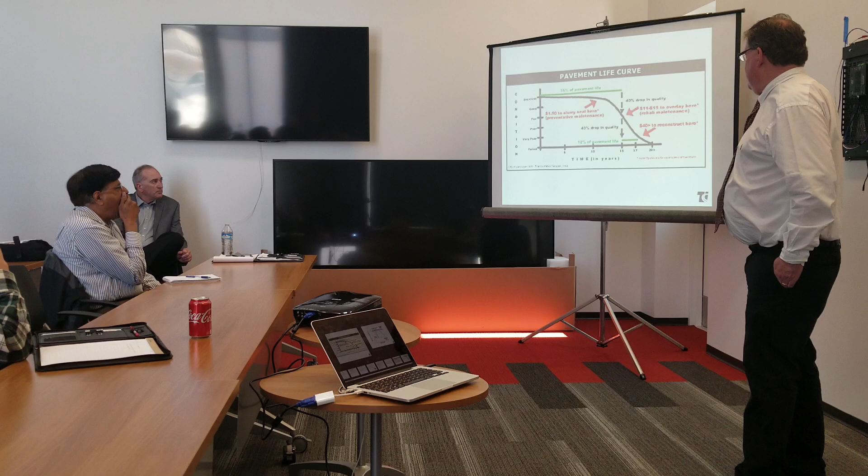Because at some point, that deterioration accelerates in rate. And if we wait until that steep part of the curve, we're going to spend much more on our maintenance or rehabilitation of that pavement. The idea is, we do maintenance, we shift the curve out, we get additional life.

An example from Whistler, because I was promoting the tool. This was out of a consultant's report to the Town of Grafton, and it's an example of the kind of simple what-ifs you could do with that software. They looked at their system, PASER 1 to 10 rating system. I don't like that it says 0 there because there is no 0 in the rating system. They sorted basically their system into what percent falls into each of these bins.

0 to 3 that need reconstruction, and you can select these parameters in the software, so you can select whether you want to do 0 to 3 or 0 to 2 or however you want to sort it. So they have almost 3% in that condition, 21% in 4, 18% in 5, 21% in 7 to 8, 31% in 9 to 10. So what happens if we continue with our current budget for 5 years? Well, it goes from this to this, based on their current budget and their current maintenance procedures.

Any problems with that? There, I'll give them to you both on the same graph. First thing, you do not want to manage based on average rating. You don't want to go to your council and say, well, we're going to continue on this. It's really not that bad with this current budget because we were at a 6.98 average rating, and projection 5 years out, we're going to be 6.72. So it's not that bad. It hasn't changed that much.

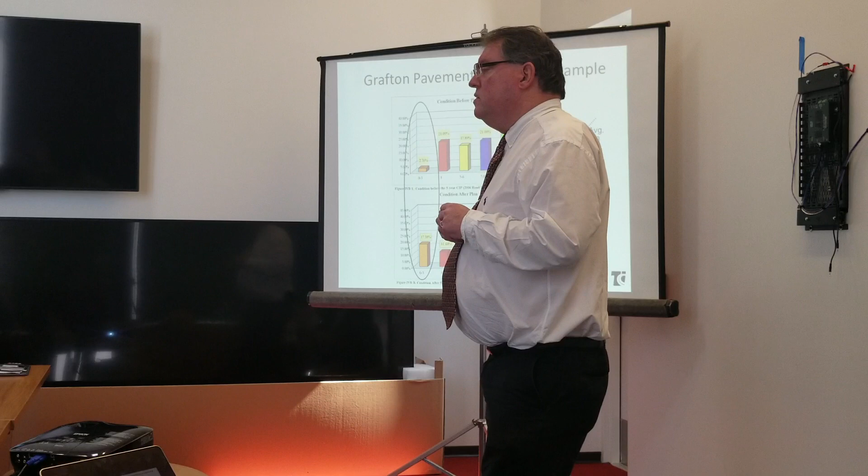I was curious. So you're saying that from your experience, you think that what it's doing is giving you a percent of segments. Yes. Okay, I will check on that. For us, Whistler has about 1,000 segments, and for our in-house database, we have about 500. You can go into that system, I know you can split segments, I believe you could also combine segments as well. So if you would like to get it to match up better with your in-house, that can be done. So being that it's based off of segments, is that really a true projection of where you're gonna be? If it's based off of segments, it's going to shift that a little bit.

In the city of Middleton, we have around 72 miles of road. If I'm basing that off of segments versus miles, I'm not gonna be able to look and say, in my 72 miles, my percentage is this. That's where I wish it would flip it, by the mile. Okay. I'll check into that a little more, and if you have a minute at the end, we could have a discussion about that.

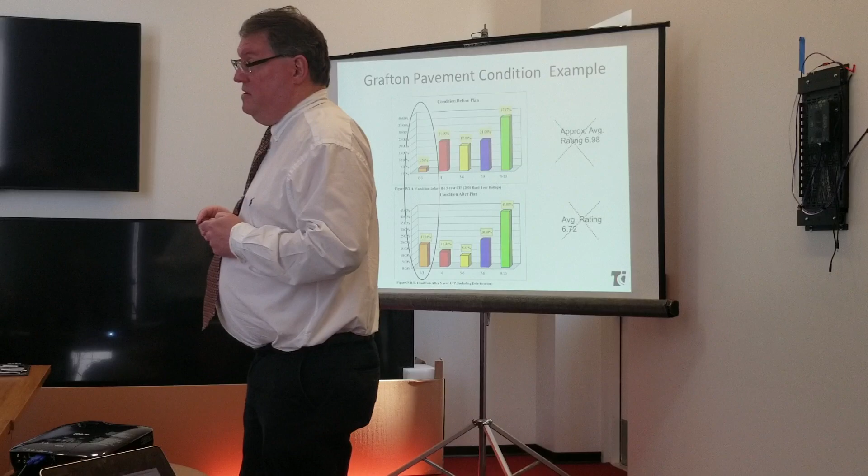I have the disadvantage, I wasn't on board when they developed the software, but I am trying to talk them into doing some upgrades. So getting that kind of feedback, trying to get upgrades on the condition deterioration curve so that they'll match a little bit better to experience as well. So I'd like to talk to folks who are using it about some of those things. I'll be happy to have a little discussion at the end about that. Yeah, I would say that is a good idea, just way too many segments.

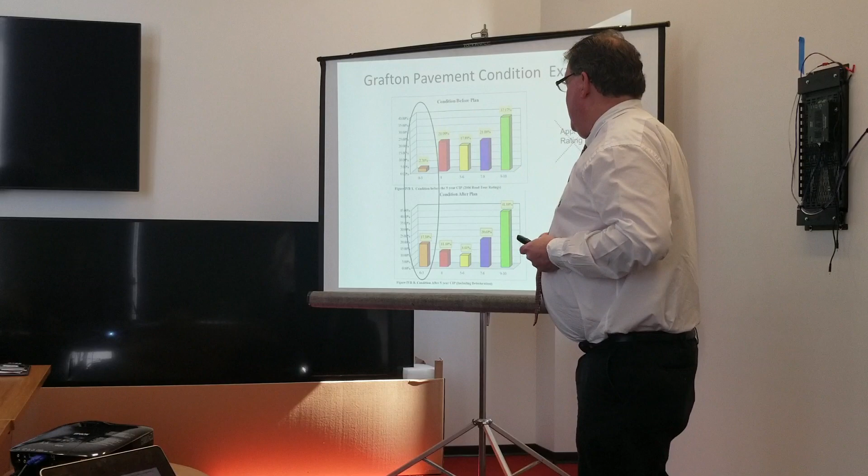Yeah, although in terms of looking at ratings and segments, and this is going to kind of veer a little bit from the topic, you want to select the segments based on pavement that is in similar condition. Okay, so if you had, and I realize a lot of times in cities and villages, you're probably doing it by blocks, roughly. So if I have 5 blocks that were constructed at the same time, the same condition on the same road name, I'm probably going to do that as one segment. But if 2 of those blocks were constructed at a different time, have a different thickness, probably should be a different segment. It probably does make sense to break it up that way, even in your rating system.

If you're getting down to breaking down smaller than blocks in a city, that wouldn't make sense to me. But it does make some sense to break it up by the parameters of that. If there's an area that I know had very poor soils and it's going to perform differently, it makes some sense to break that out from the rest of the segment.

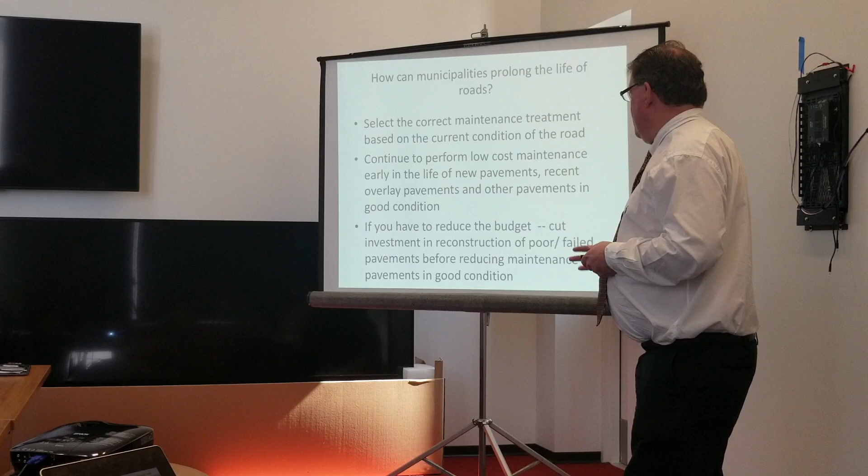All right. If we're looking at budget issues, don't cut your crack sealing, don't cut your surface treatments, don't cut those lower cost maintenance treatments, because those are things that are delaying the deterioration of your better conditioned pavement. That's a little bit of a challenge, because you go to a board and you say, well, we need to keep spending money on this, let's cut one of these reconstruction projects so we have money to do maintenance.

And what do people call and complain about, or come to board meetings and complain about? The roads that are a 6 or a 7 or an 8? No. You know, the 4, the 3, the 2, that's what gets the attention. But if we continue to do that, shift the resources just to the worst conditioned pavements, we're going to dig ourselves a bigger hole. There is no magic bullet.

Despite the fact that in Iowa, the Asphalt Association has a thing here that says they found the magic bullet. It's just the magic bullet for interlayers between concrete pavements and asphalt pavements. They have a lot of concrete local roads in Iowa, more than we do in Wisconsin. So actually, when you read the article, it's a tool that they found is very effective for a certain application. And that's the way we should look at all these maintenance tools. Selecting the right one for the particular conditions that we have.

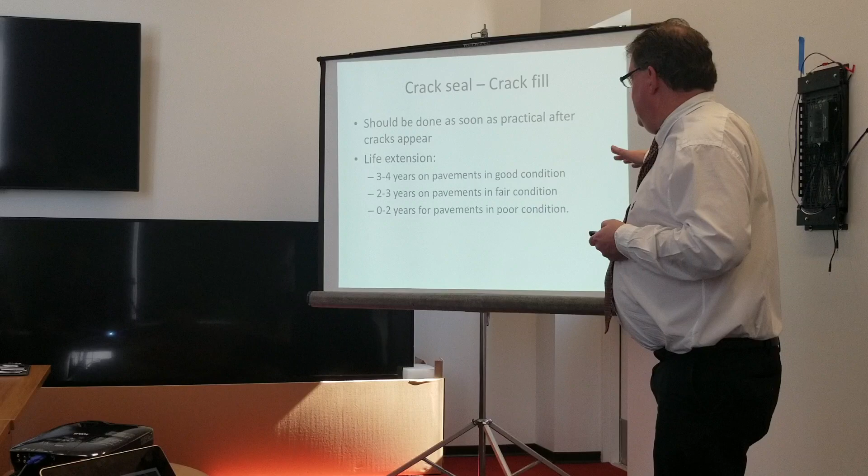So something like a crack seal or crack filling, we should continue to look at those maintenance treatments. We should continue to do those treatments. When you look at life extension, generally what is shown in different research, if pavement's in good condition, it's saying 3 to 4 years of life extension. If you wait and you do that crack seal later in the life, 2 to 3 years in fair condition, it says 0 to 2 in poor condition. That pavement has deteriorated to the point where crack seal is probably not a good strategy when you get a pavement in poor condition. So you want to continue to do those type of maintenance treatments. You're all familiar with those.

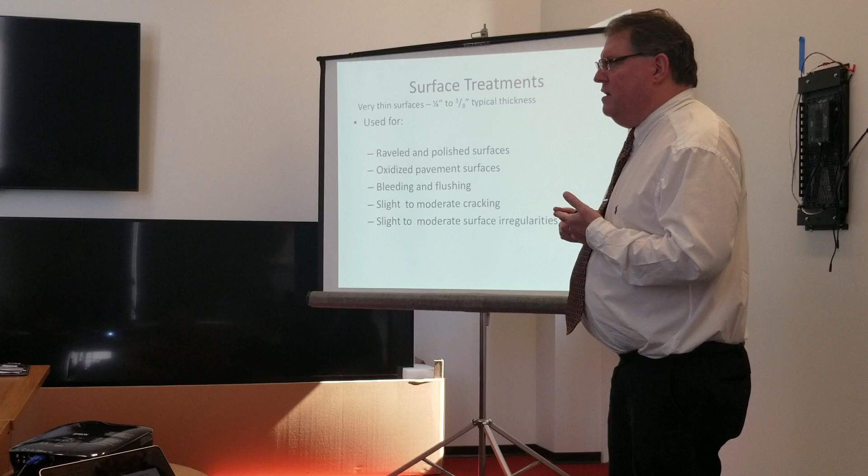Surface treatments. One of the kind of preliminary questions I got when I was asked to do this is, do we have alternatives besides chip seals? Right, that's not how the final brochure came out, but that was one of the questions to begin with. There are a number of surface treatments, and we'll touch on a few of them. Again, we'll talk about selecting the right one for your appropriate conditions. We want to use these on surfaces that are not structurally unsound, but they have some of these surface distresses. Raveling, oxidation, bleeding, moderate cracking, slight or moderate surface irregularities, because we're only putting 1/4 to 3/8 of an inch of material if we're putting a single layer down.

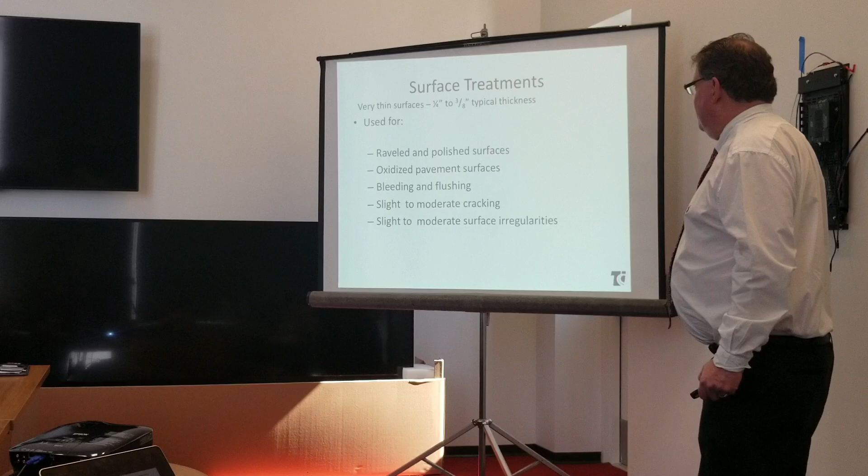We're not going to correct big ride issues with these treatments, but we can seal up that surface, we can give a new riding surface, we can get some life extension out of the products. So severe cracking, severe deterioration, base problems, drainage problems, we're not going to fix those with a surface treatment. So if we're putting surface treatments on roads that have these kind of issues, we're really just putting a Band-Aid on the road for a year or two. And it's really important that everybody understands that and doesn't expect anything more out of that treatment than just that 0 to 2 year life extension.

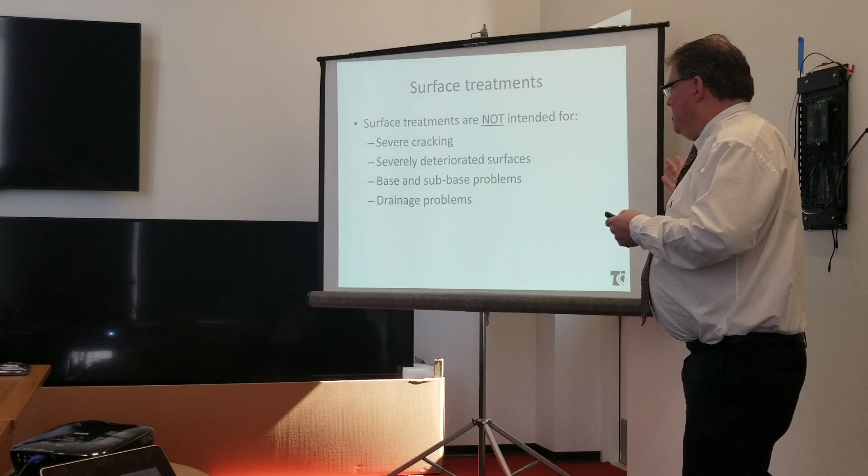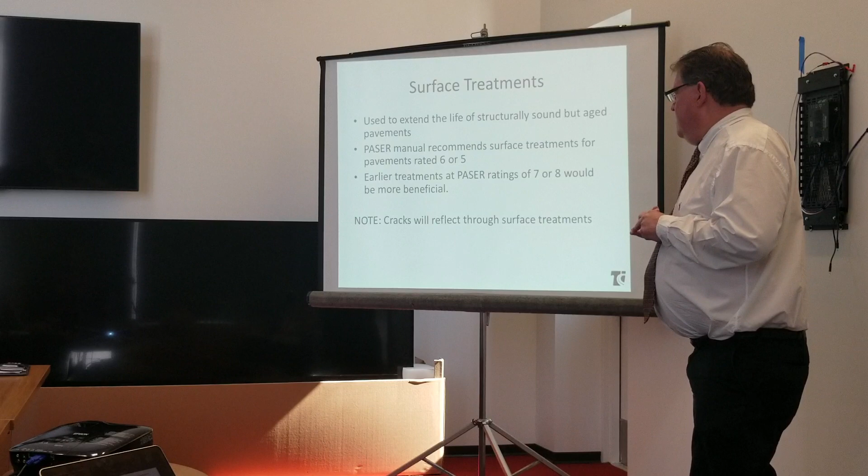Right? Structurally sound pavements. Our manual says treatments of this type would be for pavements of a rating of 5 or 6. But really all the research is pointing us to the earlier you do the treatment, the better. So when we revise that manual, I'm really looking at probably showing it for 7s as well.

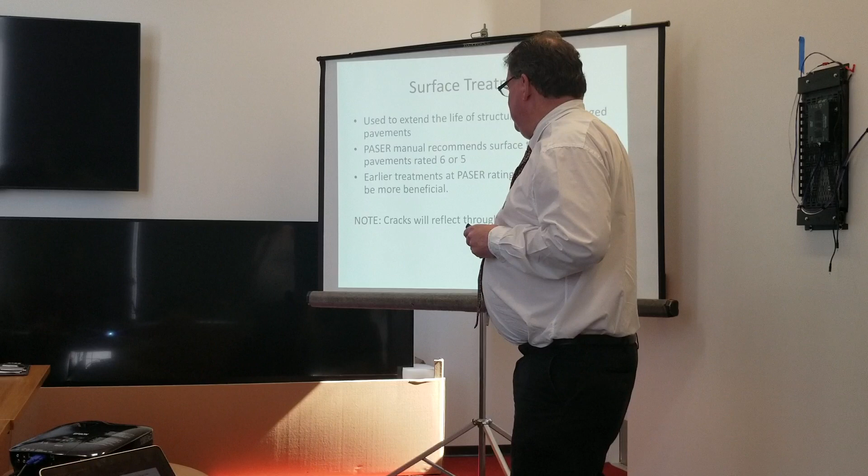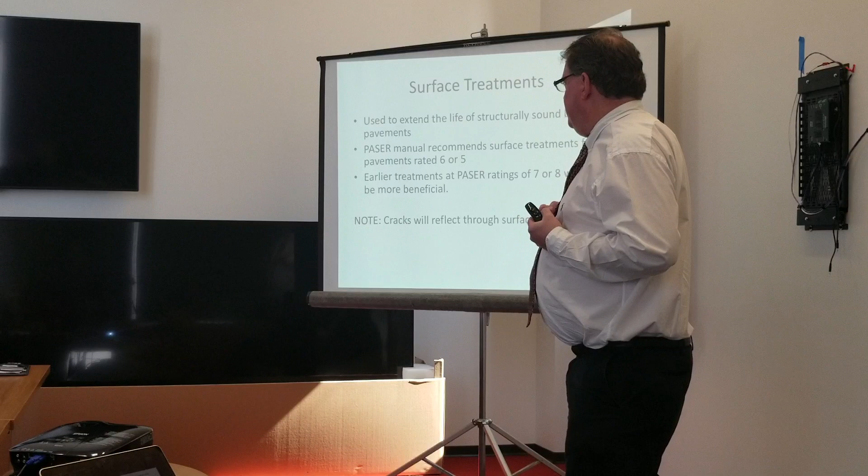We had some discussion just beforehand with the other speakers about, is a 5 really beyond the point where we're doing surface treatments? Our manual figures it still has structural capacity. These are surface issues, and so it would still be appropriate to do a 5, but you're getting less life extension out of this when you do it at a 5.

And here's just a quote from one piece of research talking about that early life deterioration of the pavement and how it'd be beneficial to treat the pavements early. So it's saying aging occurs in the first 2 to 4 years of service life. And you build a new pavement or you resurface a pavement, what's the first thing you do? You go, I don't need to worry about that one for a while, we just put a bunch of money into it, right? So we don't need to think about that for 5 years.

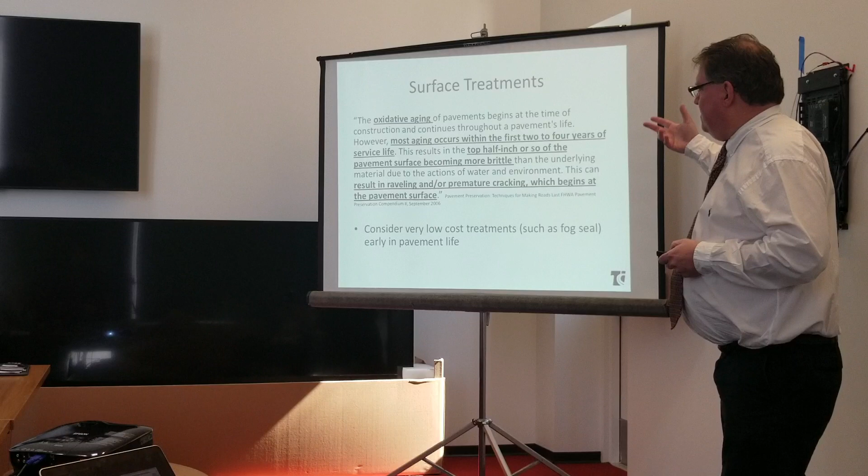Is that pretty much the way we think in a lot of cases? Well, this is saying no. As soon as you invest that money into it, you got to now think about what are the low-cost maintenance treatments we might do to that. So we'll touch on things like a fog seal. There are people doing fog seals as part of a construction contract. There are people doing fog seals at a 1-year warranty period because they're buying into this. They're saying, let's start doing some maintenance on these pavements as soon as the deterioration is occurring.

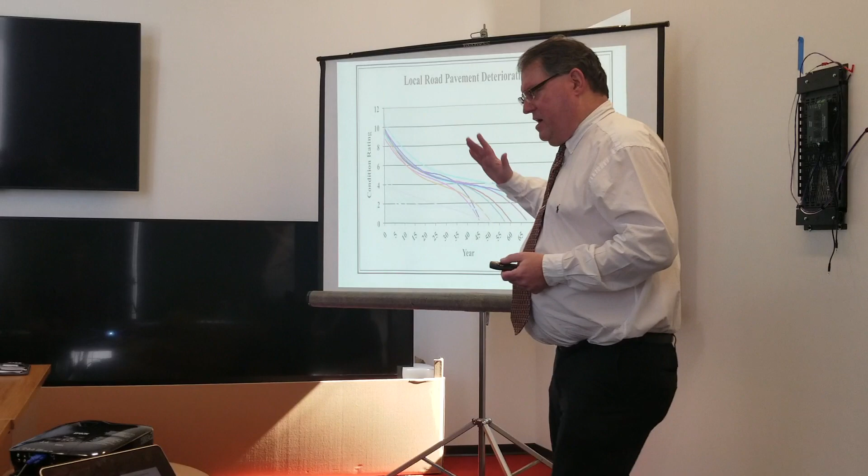These are actually the curves that are in WISLR for deterioration for different pavement types. And you remember that theoretical curve that we had about deterioration? It said pavements deteriorate slowly, and then somewhere out here it goes down like this. This was reality based on actual ratings and average ratings in Wisconsin, so averaging statewide ratings. And that's kind of showing that deterioration right from the start. Okay, it's a fairly steep curve, fairly steep angle, right from the start.

I worry a little about this graph because somehow somebody on this one pavement type reported a number over 10. I don't know quite how that worked. And we got the graph extending to 0. So I think somebody projected the equations on the two ends a little bit. But that gives you a general idea of what that deterioration looks like.

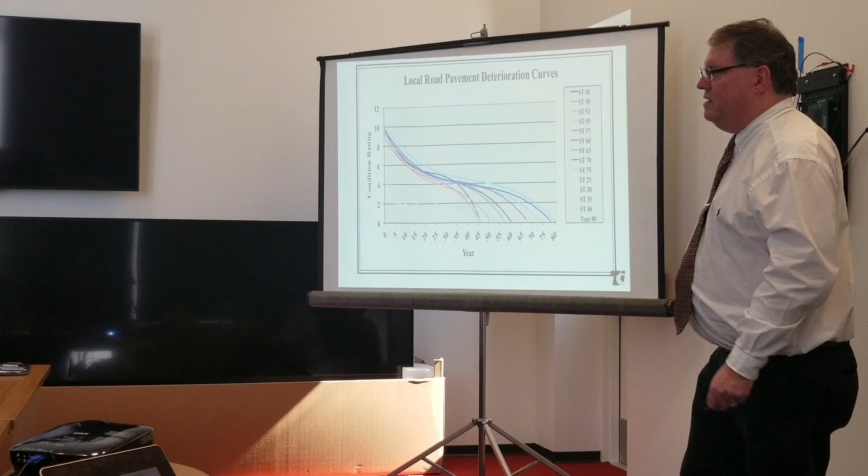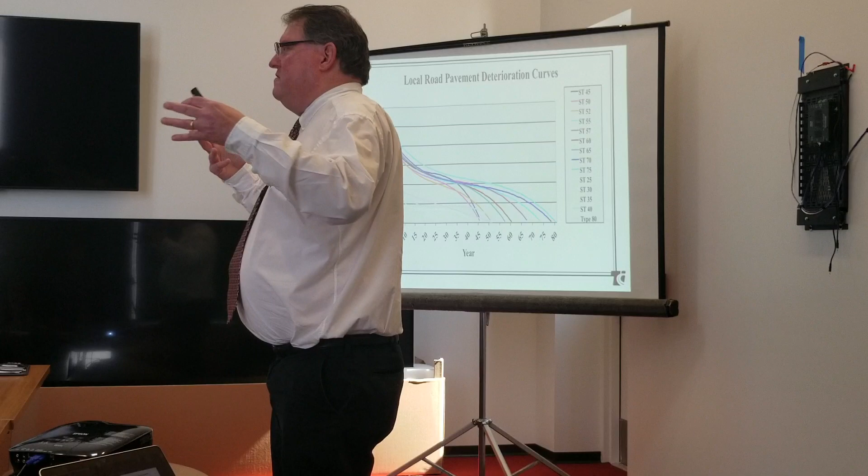Is that with or without treatment? Well, that's the one thing that gets a little difficult, is you have a mixture of pavements with treatment and pavements without in the WISLR system. And so that's a challenge, because I'm trying to get you to do maintenance, and we're reporting based on the maintenance, and then how do we separate those out when we do the... If I'm looking at that, I'm not seeing much of a difference in the graph.

It's a statewide average, so it's taking county roads, town roads, city streets, and it's taking ones that have had crack sealing done, ones that haven't, ones that may have had a surface treatment, not had a surface treatment, and they're all getting mixed together. So it's a little bit of a challenge without breaking this down a little further, which is one of the other things we'd like to do in the future with that software, is break it down by more pavement types, and maybe break it down by agency types. So we put county roads together, city streets together, town roads together. Do some other things so that those curves fit a little bit better with your field experience.

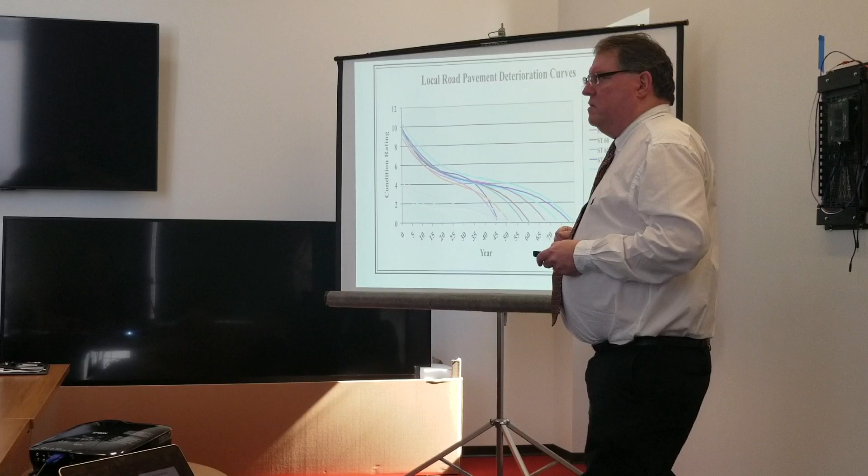So talking about surface treatments. These are all the things that you're going to get out of those. New wearing surface, improved friction, slowing aging, sealing the pavement surface.

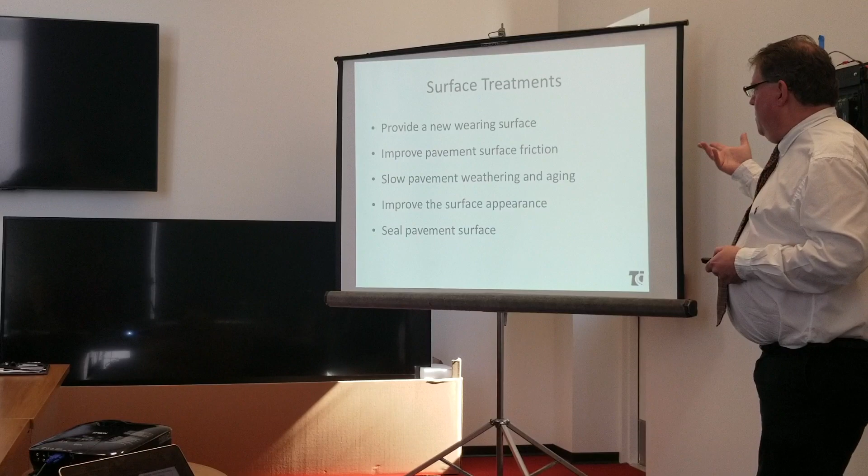One of the things to look at, if these treatments aren't working well for you, before you say, I'm going to get out of the business of doing surface treatments on my pavements, is looking at, are there things we're doing wrong or things that our contractors are doing wrong in terms of how we're doing this? So if you're putting those treatments down very early in the season or very late in the season, when temperatures are marginal, when you have a lot of moisture, you're going to have a lot more failures.

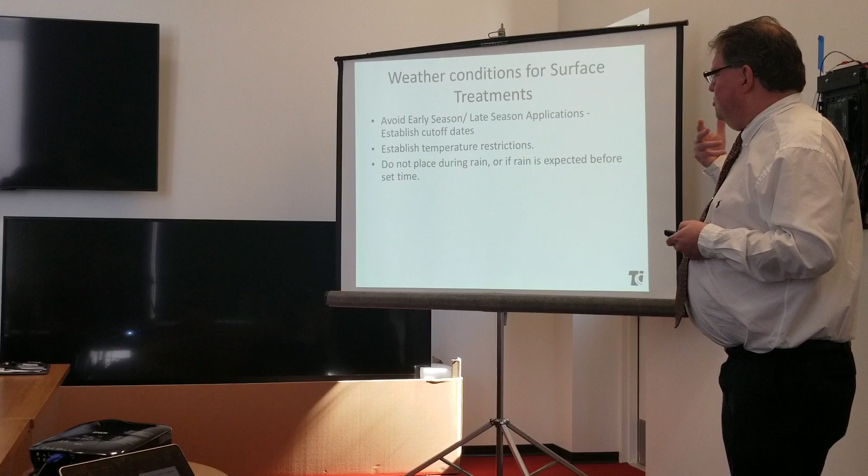All right? And so everybody in this room wants theirs to be done in like July or August, right? So you have the best chance of success. What's the problem with that? The contractor wants to have a whole season of work, right? But I prefer to have my work done at the time when it's optimum to do that treatment. So temperature restrictions on early season, late season, not doing things like trying to push it when it rains in the forecast.

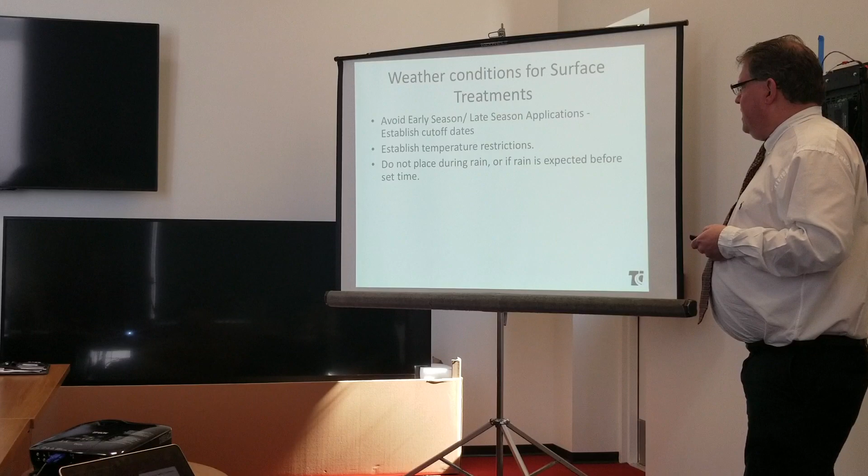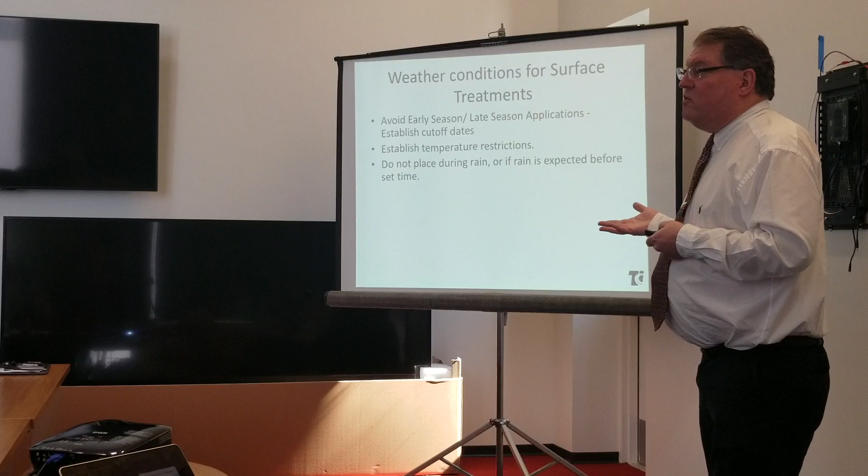All right, I've seen failures. I've gone out to jobs where I've been called out because there was a problem, and that's what it was. It rained before this material could cure. And so think about those things in your specifications. Make sure that you address those things, and make sure when you have a discussion with your contractors, you know, pre-construction type of meeting, that you've made it clear that we are serious about these limitations. They're there for a reason. They're there to assure you get good performance.

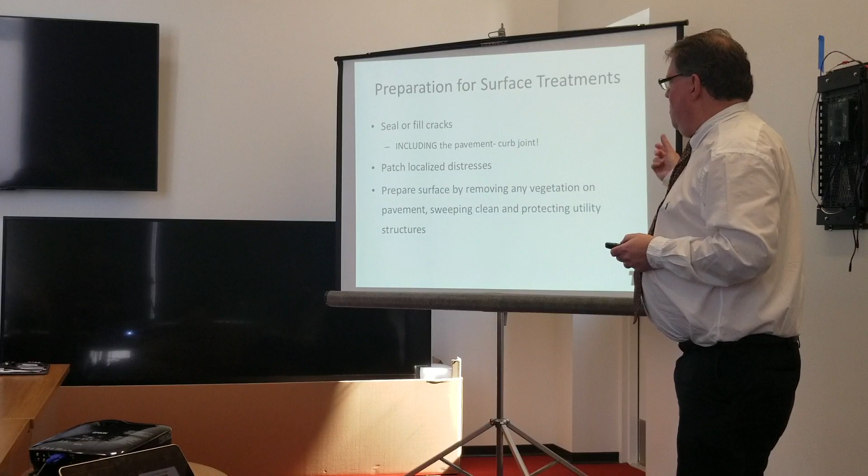Even with the surface treatments, we still want to seal or fill cracks, including the pavement curb joint. How many folks are sealing that joint between the pavement and the curb when you're doing your sealing? How many are not? All right, we would encourage you to seal that joint because we have a crown pavement, water runs from the middle to the edge, water gets to that curb line, it's not going to magically jump over that joint. It's just not going to do it. So sealing or filling, if it's wide, it's really more of a filling type of material, that joint is important.

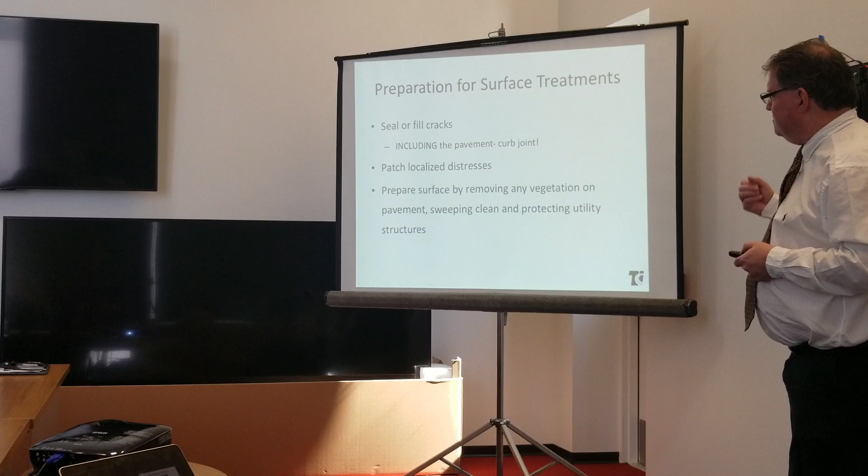We take care of localized problems, patching those type of things before we put down a surface treatment. Make sure surface preparation is good. Make sure we remove vegetation from cracks. All these are things that are going to improve our performance. Fix drainage problems. If we have drainage problems beforehand and we do a maintenance treatment, we're going to have a road with a maintenance treatment and drainage problems, and we're not going to extend life.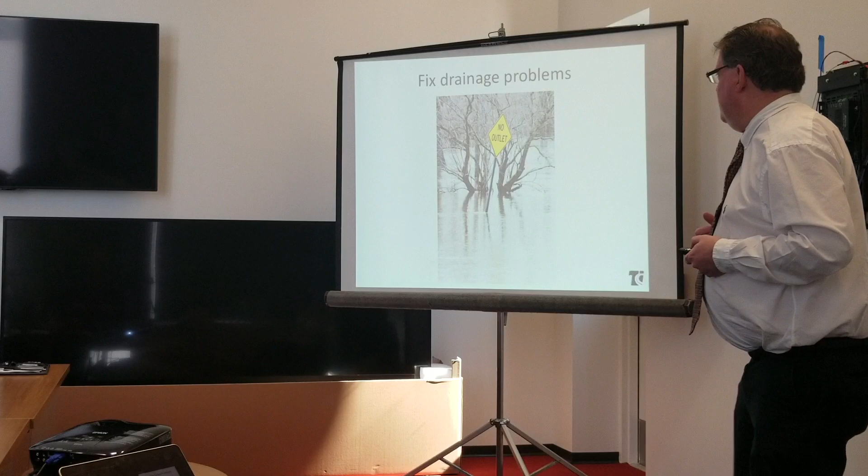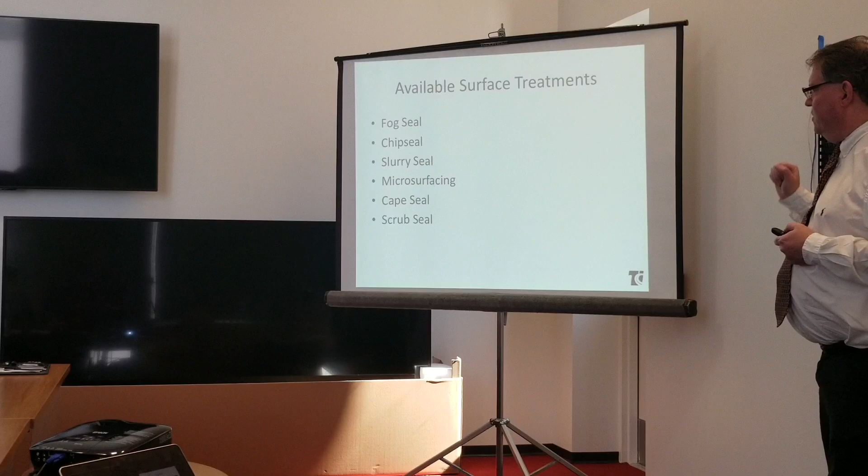So available surface treatments. This isn't everything, but this is probably the range of things that you could specify in Wisconsin and find someone to do them for you. Maybe I'm missing something. So if there's something else you've done, I'd love to hear about it. If there are other things from the standpoint of the association that are out there, I'd love to hear about those as well. We touched on the fog seal, very early treatment. Chip seal, I think many of you are familiar with. Slurry seal, microsurfacing are somewhat similar. And then cape seals and scrub seals, which aren't really new technology, but they're things that are done less frequently here in Wisconsin, but we're starting to see a little more of.

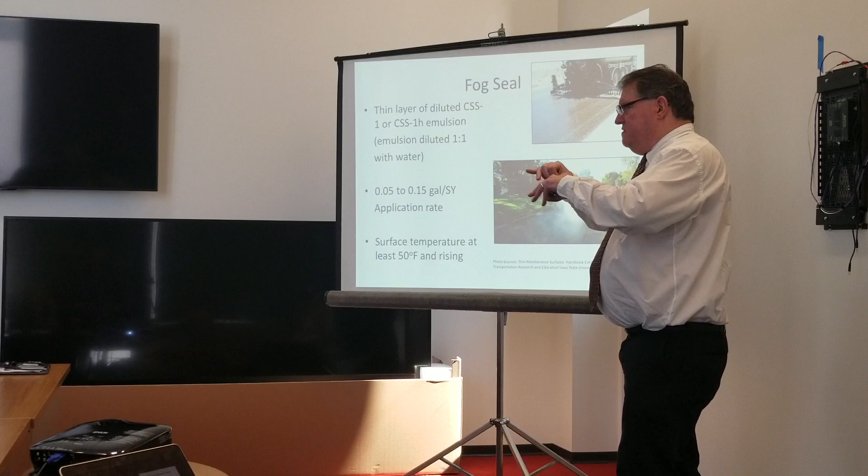Yes? Would you consider that like an 8 for a PASER rating, like an 8, or a 9? I would not. When you look at the PASER rating system, it basically talks about a seal coat, and you put a seal coat, assuming you took care of underlying distresses, it bumps the rating back up to an 8, right? Right. In reality, I would be putting this onto a pavement that probably has a rating of 8 or 7, okay? I want to do this very early. It doesn't have any aggregate, it's just asphalt emulsion. It's just intended to fill in some of the open voids on the surface, just to seal that surface up, slow the deterioration of that surface.

So I probably would not bump my rating up from that, but the idea is that we'll hold it at that rating for a longer period of time. So you might go back in 2 years, and that 8 might still be an 8, all right, rather than deteriorate down. But you really aren't doing a lot to the surface other than just spraying some asphalt on top.

All right, for folks who like the technical information, you're going to vary the application rate based on how open that surface is. All right, chip seals.

Very common surface treatment, maybe less common in curb and gutter streets than on rural cross sections, but I know it's something that we do, and it's something that I've done on urban cross section streets. If you're doing it and you say, we're going to get out of the chip seal business because it's just not working well, we'll talk about a few of the things you need to think about in terms of doing it right.

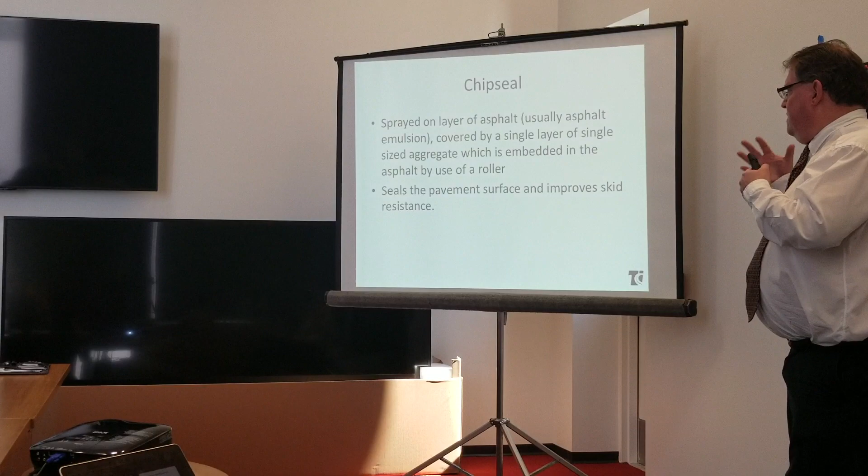First of all, it's a sprayed-on layer of liquid asphalt, often asphalt emulsion, covered by a single layer of aggregate, typically a crushed stone material that's about 3/8 inch size. Single size, doesn't have a lot of dust, fairly clean material. We sprinkle that material with a chip spreader, we roll it with a rubber tire roller, seals the pavement surface, improves skid resistance. From the standpoint of sealing that surface, giving you skid resistance, I really, really like this product. It really does a good job for a low cost.

What are some of the disadvantages of the product for those of you who've used it? What are some, yes? Complaints. Complaints, why do people complain? Messy. Rocks flying, dust. Okay, dust, rocks. Anything else? Bleeding through. What's that? Bleeding through, the tar coming up through. I'm sorry, did you get that? In the hot days, the tar comes up through. Oh, bleeding, okay, got it.

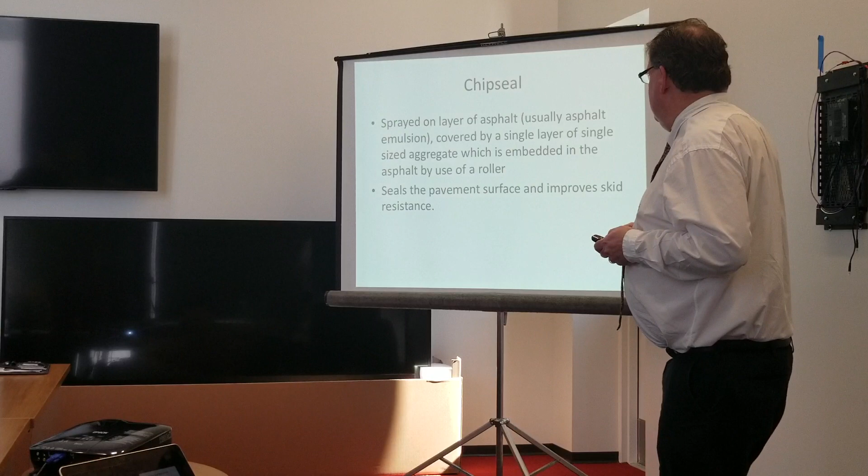Bike tires, bicycles. Bicycles don't make it, okay. All right. And the car paint. Car paint, okay. Let's talk about all these things. I have paid to detail cars before, and I know why it happened, but it actually wasn't a chip seal, it was a slurry seal. But some of those things may be issues where things aren't being done the optimum way. All right, so we'll talk about it, and I encourage you, if you're doing those programs and thinking of switching, first look at it and are there things we can do to improve our process before we just throw this out.

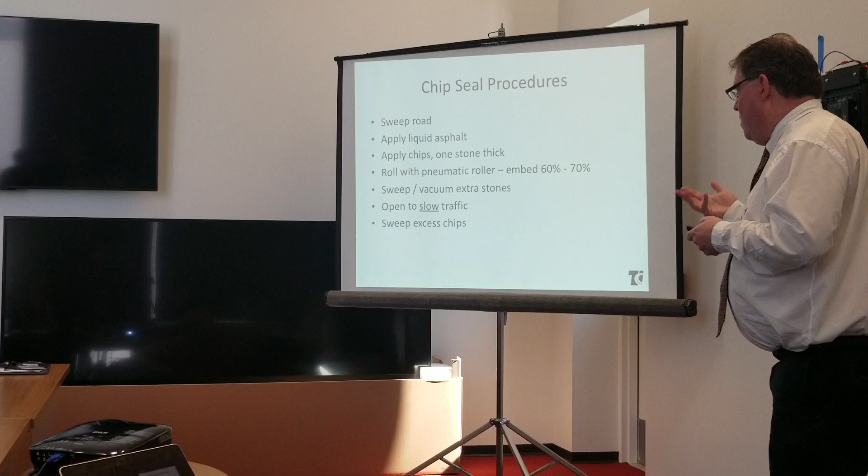That's just talking about the process. One of the things that's really important there, the design of this, the amount of liquid asphalt you need to put on the road needs to be enough so that about 2/3 of the depth of that stone is stuck into that asphalt. So, you know, if you're having problems with a lot of loose chips, we can talk about why those things might occur. All right, we said one size cubical clean material, liquid asphalt application.

There is a design procedure for figuring out how much asphalt and how much aggregate you need to put on a road. The one in Minnesota works very well for our climate. It's a modification of a method called the McLeod design procedure. And in Minnesota, they have a seal coat handbook that has that procedure in it. I'd highly recommend you taking a look at that.

So if you're ending up with a lot of excess chips, is it because we're just putting too much on the road to begin with? Is it because we're putting them on too late and they're not getting embedded into the asphalt? Is it because our asphalt shot rate is not high enough and we're not getting 2/3 of that chip embedded in? What are the reasons for having excess chips? And try to solve that problem before you just throw the process out.

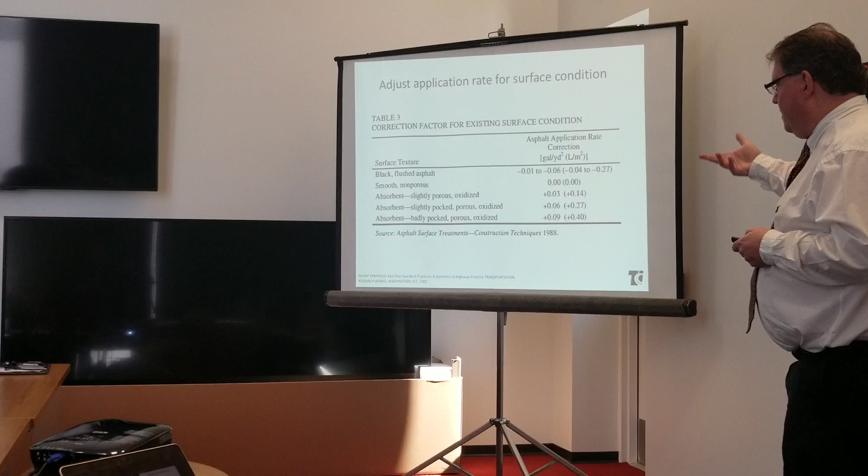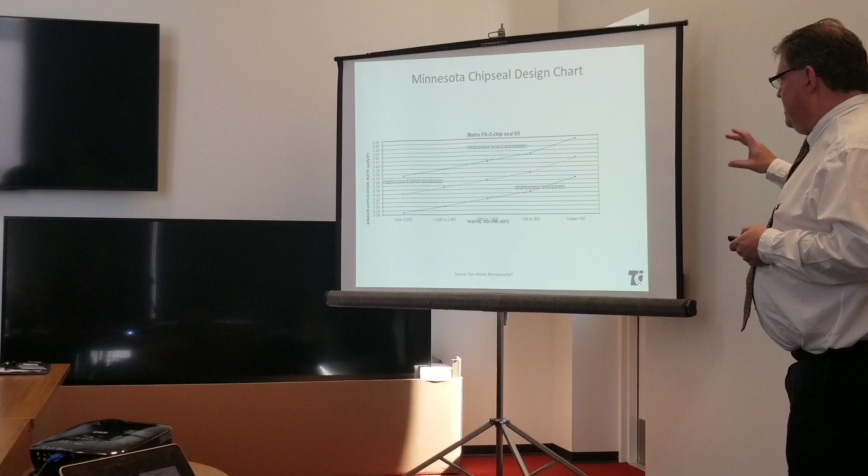This goes into some changes in application rate. If you always do the same shot rate, the same application rate, sometimes it's wrong because different surfaces absorb the material at different rates. Minnesota also says in this graph, it also depends on the traffic on the road. Higher traffic roads, you can actually cut that shot rate down a little bit. You want to make sure that the spray applications are consistent. The bars are set at the right height, nozzles are at the same angle, so you get a consistent appearance.

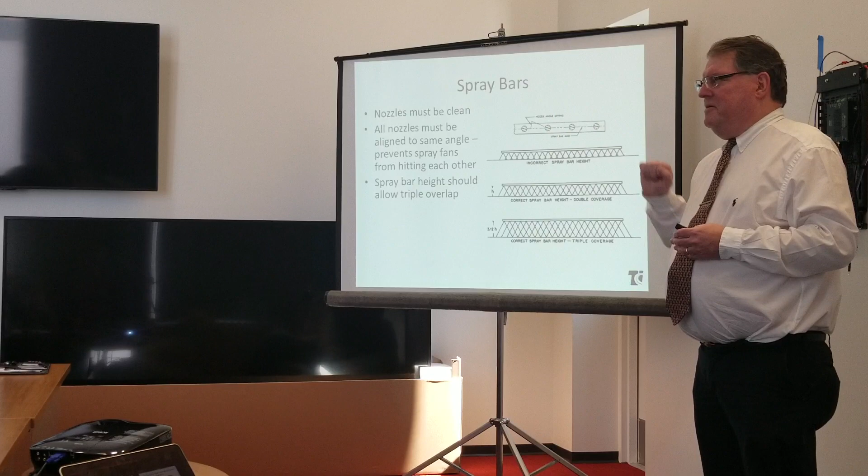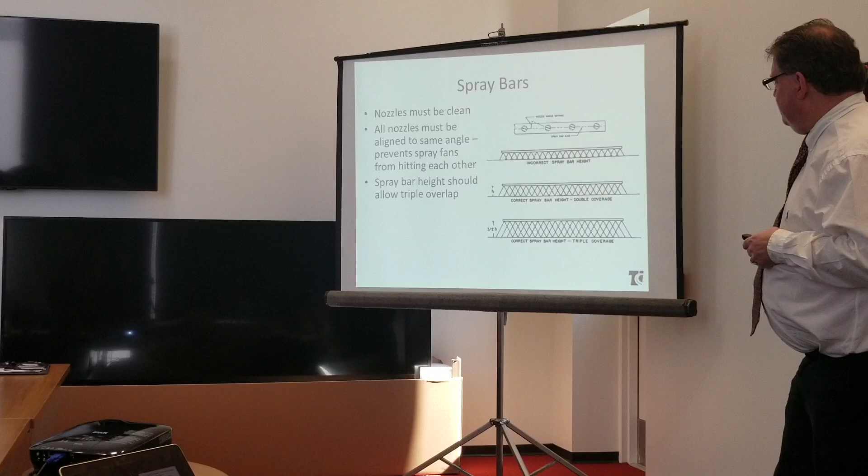I've gone out and looked at chip seals where you can see stripes down the road. That's because things weren't set up properly. So you had little hills of asphalt material and little valleys of asphalt material, and in the valleys the chip doesn't stick, and in the hills it bleeds. So you have stripes going down the road. Something was not done right in terms of the process. Something with the bar height or the nozzle angles that wasn't set properly when that chip seal was done.

All right, closely following your distributor with your chip spreader. Especially when you're doing emulsions, especially when you're doing rapid set emulsions, very close, getting that chip down right away.